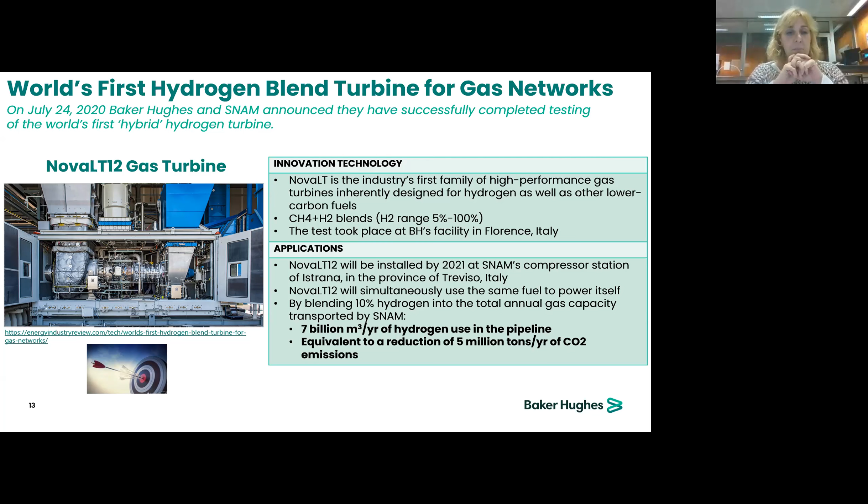So Sean, if you can go to the next slide, we see another important project that we have inside now. Because on one side, we are studying something completely new to reduce CO2 emissions, but we are also able to reduce the CO2 that is currently in the air already, produced by other sources that we cannot control or that are not part of our plant and produced by our machines.

But we are anyway able, through compact carbon capture, to separate the gases that are mixed with CO2 and other gases inside, separate the CO2, and stock it somewhere. So we are able today to do this - we are able today to take a part of the CO2 in the atmosphere and segregate it somewhere.

I tell you this because we are a technology company, and as I can say, our main asset is our knowledge. And another important asset we have is knowledge sharing. And this is all possible now, not tomorrow but now, because we have got this enormous knowledge luggage that we use every day in our everyday work, especially in technology.

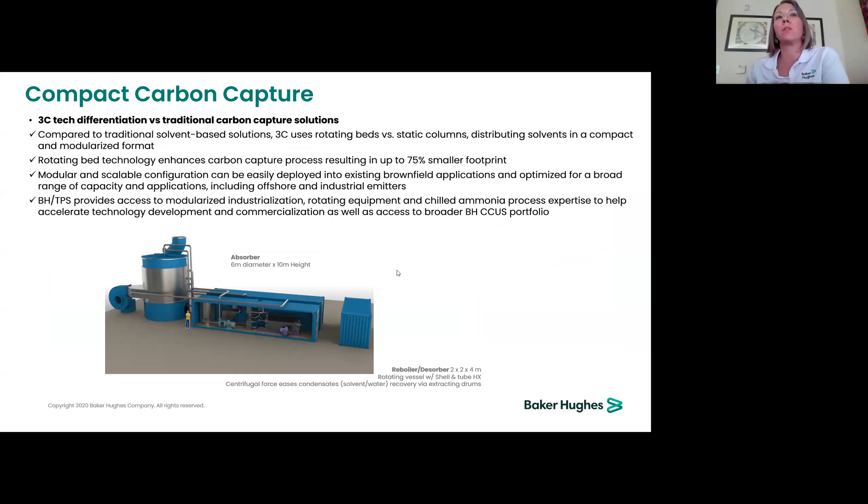Do you all know much about Baker Hughes and the legacy of Baker Hughes and GE? I'll assume not, and go ahead and explain. Two companies merged in the last few years, Baker Hughes and GE, General Electric's oil and gas division. So we're now a merged company, but we've since separated from the greater GE. So we're Baker Hughes, and I'm going to go back to the beginning of the slides to tell you a little more about who we are today.

We have four major product companies within Baker Hughes. Baker Hughes' legacy was more oil field services, and GE Oil and Gas was more digital solutions, turbo machinery, and oil field equipment. So we're all one today, and we actually refer to ourselves as an energy technology company. It's very inclusive of many things that span across the energy industry, covering different product companies. We have a variety of solutions designed for this energy transition, addressing cleaner energy and things beyond just the traditional oil and gas industry.

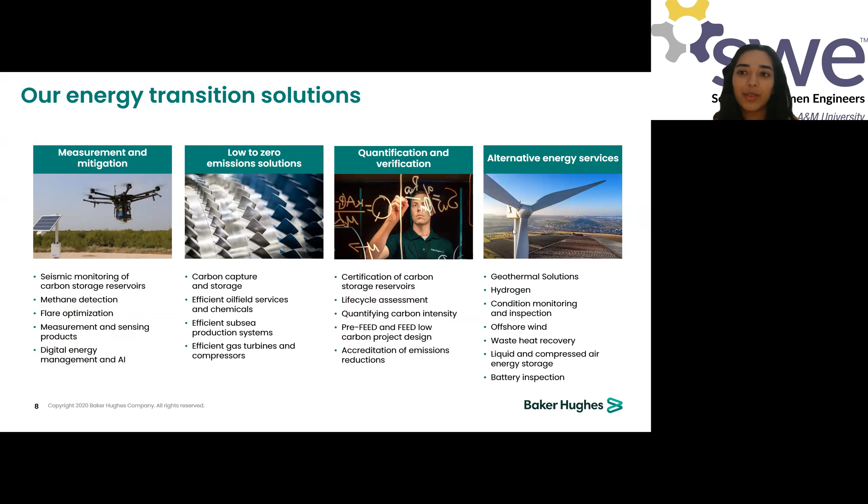So do you guys have any further questions or comments about Baker Hughes? I had a question. Toward the end of the slides, you mentioned that Baker Hughes had innovation training. So I was wondering if you could talk about some of your experiences with that and what events they focus on in that training.

I'll take the opportunity before jumping in, Alessandra, you may have a better idea about the innovation training, but we have leadership development programs within Baker Hughes right out of college. Kirby and I were actually part of that, recruited from SWE at A&M through the leadership programs, and it's a rotational program. I had four rotations in a variety of different businesses, and Kirby had about three. And actually, at the time, they paid for my master's in mechanical engineering. They had a variety of training they call A, B, and C courses.

It's geared to teach you about everything about the business, even expand upon the training you maybe learned in school, but it was focused on maybe turbo machinery specifically, or the oil and gas industry, or today there's probably a lot of stuff around the energy transition space as well. We also had projects submitted by the business that you could put together a team within this leadership program and work on. This was separate from the actual full-time rotational job you were doing day-to-day. So there's a lot of training and education just in those leadership programs alone.

You have seen Erin has shown our value. The first one is grow, because if you grow and your personal skill improves, and all the companies improve because each single person in the company improves, you are going to go really very far and fast. So you always learn, in the courses and in your day-by-day job.

There are many different ways, also attending a real master degree, a different master degree from the internal of Baker Hughes. So I would say infinite, really infinite. Now there is a lot on hydrogen, you can imagine, and on artificial intelligence. This is something really very new and something we really need to learn about, but a lot.

You take care of yourself, and when you take care of your growth, you take care also of the company's growth. It's something that is linked together.

Awesome, so we have some questions in the chat. The first question is: are there any disadvantages or challenges using the hydrogen turbomachinery system?

Alessandra, maybe you'd be best to explain, you know, we're using hydrogen fuel now in the gas turbine, so what were the challenges to get there, to going more towards hydrogen? Sorry, I didn't understand the question. Thank you, Sean.

Yes, there are many challenges. The first one is about materials, because hydrogen is the most abundant molecule in the universe, very simple because there are only 2 atoms, but it's very difficult when it meets materials like steel. So materials is for sure one of the problems we had to face. But internally we had a strong knowledge about materials. We have laboratories that develop materials, study corrosion and mechanical properties, and so we are prepared to face them.

What is fantastic is when you meet a new challenge, like a gas turbine that must burn hydrogen, and you have got this idea. You wake up one morning and say, I've got the greatest idea to solve any energy problem related to CO2 emissions. If that's really a strong idea, we have got the capability inside to realize it. We just have to say, we have to, yes, okay. So any part of the business and any part of the technology side pushes in that direction.

And it is a very powerful machine. So if you ask me about the hydrogen machine, I would say materials, now and going up to improve the hydrogen quantities, materials would be for sure one of the challenges we have to face, but we have got all the tools we need to do that inside.

If you also think about the fact that hydrogen is a flammable gas, we have to change the safety of our system. So this is a very big challenge for us, because from a certain level of hydrogen we have the technology ready, also the materials, as Alessandra said. But when you increase the percentage of hydrogen, what is around the machine, in terms of instruments and safety devices, needs to be changed and redesigned.

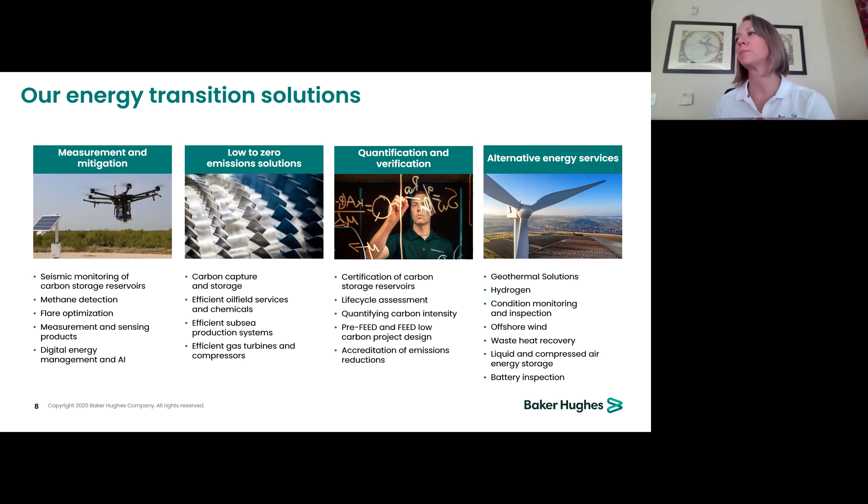Thank you, and good luck. Yes, good luck. Bye. Good luck. Bye. Have a good semester. Bye. Thank you. Ciao.